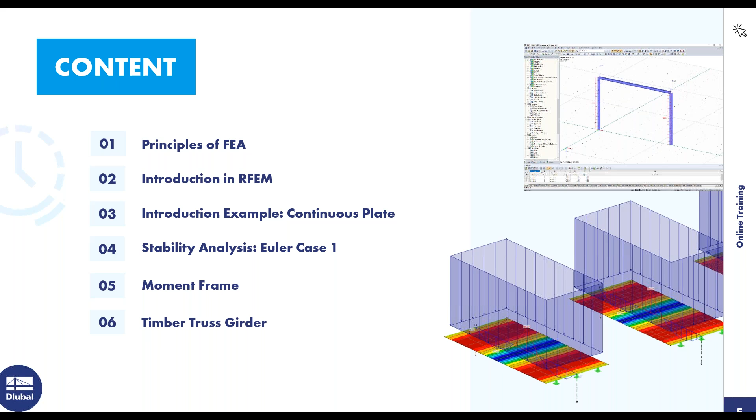So with that said, we can jump into going over the basics of FEA. So when using computer software, it's based on the displacement method, and another method you may be aware of is the force method. And this is where the unknown is the force, and then the internal forces can be calculated based off of this. When it comes to the displacement method, the unknown is displacement, and to solve for this, the displacement vectors must be calculated, and then the internal forces and support reactions can be figured out.

And the main problem today is when it comes to analytical solutions, they can be difficult to determine when it comes to large complicated structures. So doing hand calculations for some structures with complicated and odd geometry can almost be impossible or feel impossible. And the limits are being reached with large complicated structures. So it's difficult to get accurate results. And this is where FEA software comes in.

So complicated structures are then modeled and converted into a finite interconnected element mesh. And then the material and the cross-section properties are given at each FE node. And then the mechanical behavior is transferred between these elements. So here's a good word I would like you guys to walk away with and know: discretization, which is how structures are being submeshed into finite elements, which is kind of the overall idea of FEA. So that's a good word to have in your vocabulary.

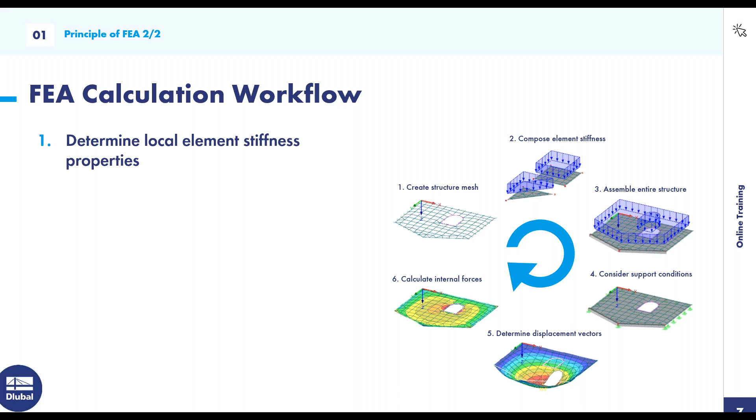Next, I want to go over the FEA calculation workflow. So this is also good to know for most FEA softwares. This is basically the workflow for them. So first, the local element stiffness properties are determined. And then those local stiffness properties are transferred to the global coordinate system, and then the assembly of the entire structure takes place.

And the boundary conditions or supports are then defined, and these could consist of sliding, rigid, or hinged. And then the displacement vectors can be calculated by solving the system of equations. And then lastly, the support forces and internal forces can be determined.

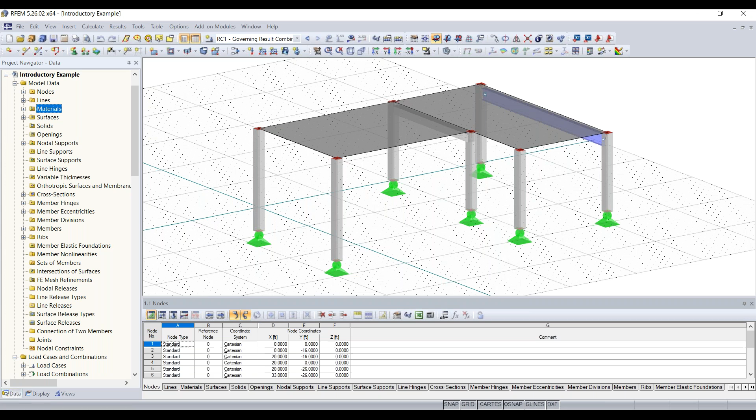Next we have our tables down here at the bottom. These tables can act like your project navigator, organizing all of your model data. But with the tables, you can change anything or add in model data. So if you wanted to model your whole entire structure with the tables, that is possible to do. So you can utilize that workflow if you'd like.

Also, you can change the background color. If we wanted a black background, we could go up into Options, to the Configuration Manager, and you can see that we can change our background to black, and also some other options as well. I'm going to keep mine white.

Then we also have the Insert menu up here, which organizes all of the tools. So if you wanted to insert nodes, lines, materials, members, this is all organized in this drop-down window. That's helpful if you don't want to use the tools in your toolbar, which is the next thing to go over.

So here are all of your basic tools that you need to model. If your toolbar doesn't look like this, you can rearrange your tools, or if you'd like that done automatically, you can right-click anywhere in this gray space and hit Reset to Default, and that'll reset your toolbar to look like mine. I think this is the best layout. Everything's organized where it should be, and I think it's helpful.

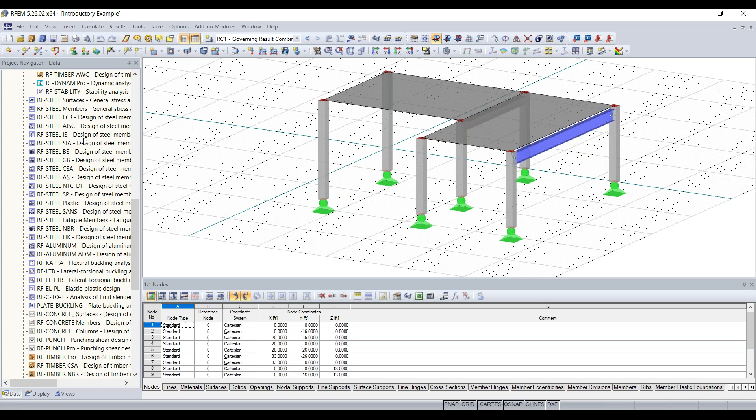In the project navigator, if you scroll down, you have a folder for your add-on modules. RFEM is great for checking and analyzing basic results such as deformations, internal forces, and support reactions. But if you want to get into designing specific materials such as steel, concrete, and timber according to a standard, this is where you would choose an add-on module to do that. We'll go over those more in depth later on.

The next tab in our project navigator is the display tab, and this allows you to turn off aspects in the graphical window. If you wanted to turn off something like surfaces, this just turns off the display. It doesn't actually get rid of the surface. These surfaces are still there, just not displayed. So you can turn things on and off in here, and you can manipulate results and things. We'll go over this in more detail later.

And then we have our views tab. Here we can set visibilities, and we can view members by cross section. So if I only wanted to view my W18x50 cross sections in my model, I could do that, and you can see it grays out the rest of the model, and I can easily point out my certain cross section there.

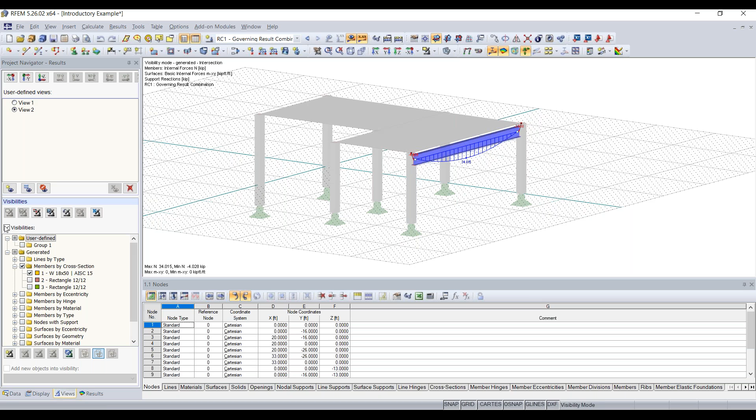The fourth tab, which you can't see right now, is the results tab. If I go up here and hit show results, and turn off my visibilities, now we have the results tab, and this is how we choose which results to show on our model. Right now I could show just my global deformations, and you can see them graphically as well. We'll go over how to view results and use this efficiently in the upcoming examples.

The last thing to go over is movement. If you have a mouse with a scroll wheel, you can press in the scroll wheel to move your model in translation. You can also use the scroll wheel to zoom in and out. If you hold Control and press in the scroll wheel, you can rotate your model. Those are the basic movements. If you're using a trackpad, you can use the keyboard arrow keys to move around, hold Control and use the arrow keys to rotate, and hit the plus and minus buttons to zoom in and out.

Before we get into the continuous plate example, I would like to pose one question: what is RFEM? If everyone wants to put their answer in the chat, we can go over the correct answer in a minute.

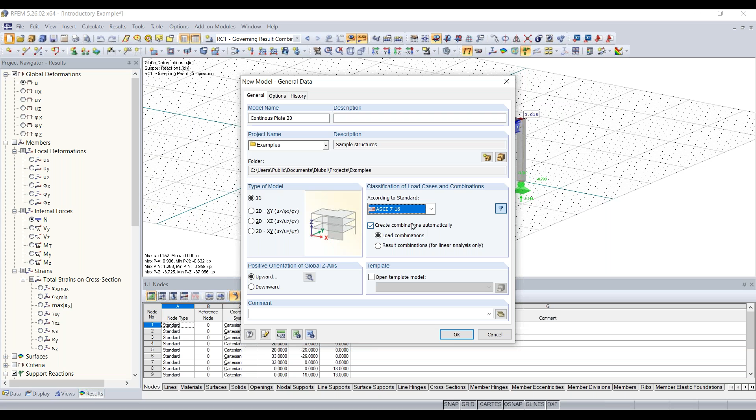Then the classification of load cases and combinations. You can have your load cases and combinations generated automatically according to a standard. If I hit this dropdown, you can see we have most standards to choose from. Today I'm going to use ASCE 7-16 for this example, but we could have used any other standard. Check this box to have the combinations created automatically.

Down here, you can set the orientation of your global Z-axis. There are two axis systems, the global axis system and the local axis system. If I click on this details button, you can see that each element in RFEM has a local axis system, and we want to have this set to downward.

So now that all of these options are chosen in our general data, we can click OK. And one other thing I'd like to also mention is I'll be using imperial units for this example, but you can change between imperial units and metric units pretty easily by going up here to Options and then Units and Decimal Places.

So if I wanted to switch from imperial units, I could open this up, and then there's a button down here called Load Saved Profile. So RFEM comes with 2 saved profiles by default, metric and imperial. And if I wanted to switch to metric, I would just have to double click on it. Or if I wanted to set metric as my default, I would check off this box here. So for now, for this example, I'll be sticking with imperial, but just know that you can switch back and forth between those pretty easily.

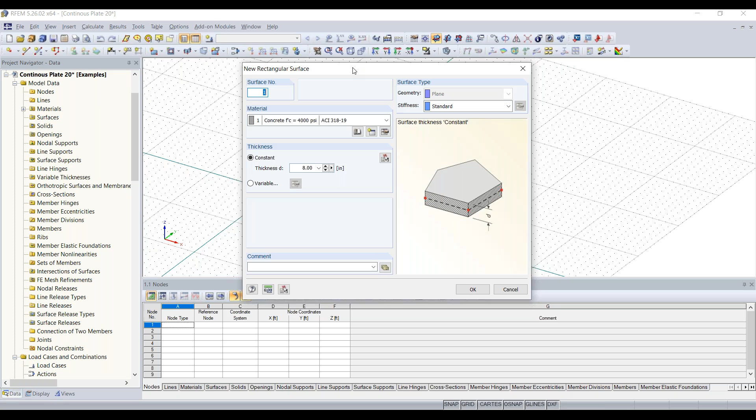So now the first thing we want to do is just create one of our plates. And to do that, there is this tool here called New Rectangular Surface. So if I click on that, you can see this dialog box will pop up called New Rectangular Surface. And the first thing we want to do is create our material. So you can see here, I already have a material loaded in, but if you don't have this loaded in, you would want to create a new material.

You can see here, you can create your own custom material by just entering the material constants, or we can choose a material from the material library that RFEM has built in. So I'll choose that. And then this material library dialog box will pop up. And on the left-hand side, you can filter to concrete. So for this example, we'll be using concrete. And then the material category.

And then for this example, I'm going to use the ACI standard, but you can also choose from other standards to pick your material out. You can see we have the Canadian standard as well as Eurocode. So I'll choose ACI, and then I'll choose 2019, the latest standard, and I want this to be 4,000 PSI concrete. Then at the bottom here, you can also see your material constants or material properties. If you would like to check those, you can do that. So I'll just hit OK.

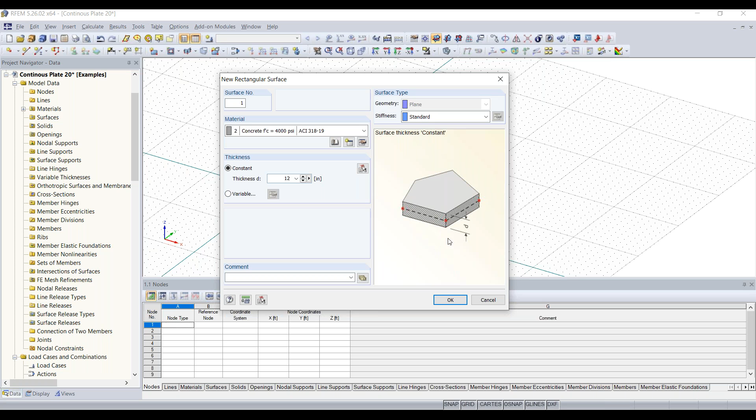And now the next thing we need to tell the program is what the thickness of this plate is going to be. And for this example, we're going to make it 12 inches. And now everything else is basically entered, so we can click OK. And you can see my cursor has turned into this reticle here, so I can snap to any of these grid points to put down the first corner. And the first corner is going to be located at the origin. So I'll left click on the origin, and then this plate's going to be 32 feet by 16 feet. So I'll go 32 and then up here to 16. And then I'll click again. And now you can see our first plate has been created.

Now the next thing we can do is we can either just draw the same plate up at the top here, or we can use the move and copy tool. So what I'm going to do is just right click to cancel out of that tool. And then I'm going to just highlight the whole plate here. And I can hold my control key down and then left click, and I can move this plate up, and I'm going to have these 2 plates spaced out by 5 feet.

And then the other option you can use is the actual move and copy tool. So if I highlight the second plate here, and then I go up here to this tool called Move and/or Copy, I can click on that, and then I can make one copy of this plate, and I want to move it in the Y direction, 21 feet.

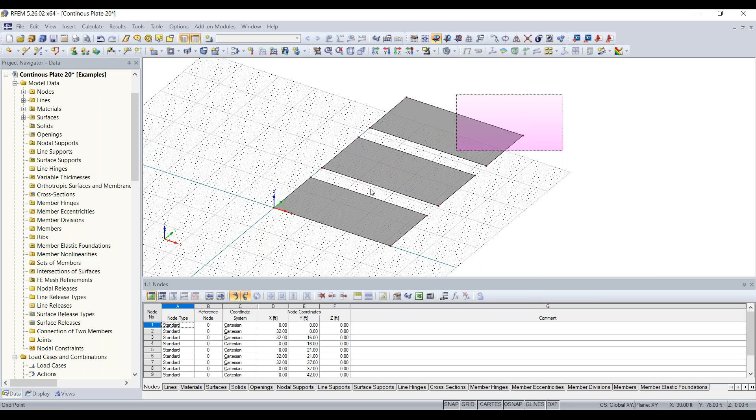Then just to clean up the model a little bit, I'm going to highlight all three of these, and I'm going to just drag this bottom left-hand corner of the second plate down to the origin, just to keep our plates within our grid here. And then also I just want to make some space for the beam that we're about to model at the top.

So to create a continuous beam, we're going to go up here to new single member. And this new member dialog box looks a little similar to the one for surfaces, but it's a little more complex, as you can see. So what we want to do is tell the program basically what cross-section and material this member is going to be. And you can see there's a member start and end. Just focus on the member start. So the whole entire member will be this cross-section and material.

We can click on this button here, create new cross-section. And then you can see you can enter manually the cross-section properties, just like the surface, or you can go up here to this button, import cross-section from library, which is what we want to do. So we'll click on that. And then you can see we have our categories here in the cross-section library. So we have our rolled cross-sections based on standardized rolled cross-sections.

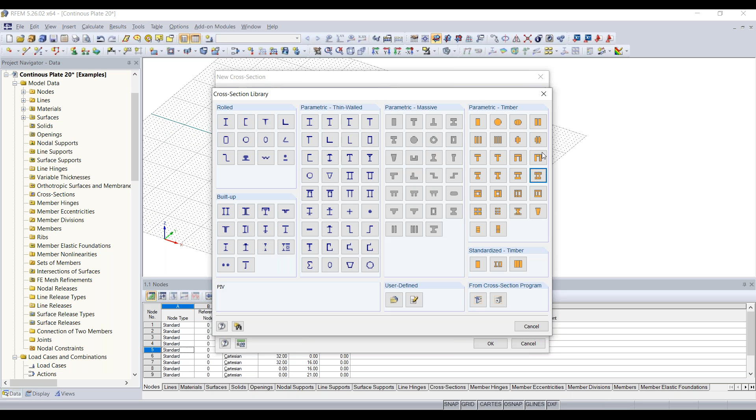And then we have our built-up sections here. And then we have our parametric thin-walled sections, so you can change these dimensions or input them manually as you would like. Then we have parametric massive, which is what we're going to use for our concrete continuous beam. And then parametric timber, and we have standardized timber down here. So I'll just choose the rectangular section from our parametric massive category.

And the base of this is going to be 40 inches. And then the height is going to be 16 inches, or 12 inches, so exactly the same as the thickness of our plates. And then the material we'll be using is the same as our plates, so 4,000 PSI concrete. So I'll click OK and click OK through all of these dialog boxes. And then I can start drawing my beam.

And I'm going to make this 5 feet away from the plate, like the other plates. So I'll just click for the member start. And then I'll click for the member end. And I'll right click to cancel out. And now you can see we have our continuous beam here.

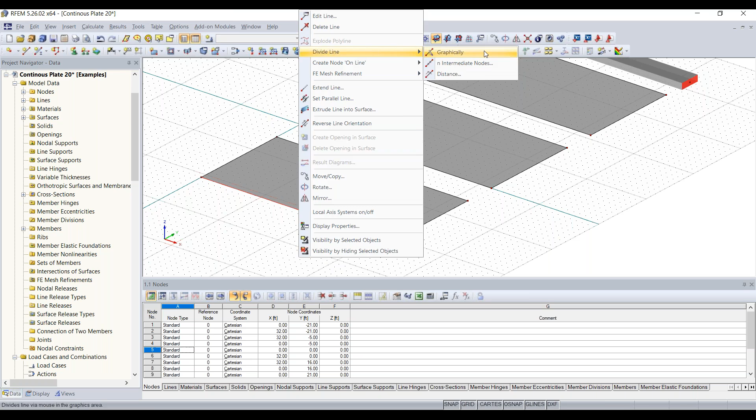So now the next thing we want to do is divide these lines here, because we're going to add in some center supports to the midspan of our plates. There are multiple ways of dividing lines in RFEM. I can just right click on this line here, and my shortcuts menu will pop up, and I want to go to divide line, and you can see there are 3 options for dividing a line. I can divide it graphically, which just allows me to snap to a grid point, and I want to divide it directly in the middle at 16 feet. And I could just keep going to the next lines to divide them.

But there are also a couple other options, so I can divide them by an intermediate node. So you can see here I can divide line by n intermediate nodes, and this will just divide it evenly. So if I just choose one node, it'll put a node directly in the center of that line. And then the third option is you can do it by distance. So if you really want to get accurate on where this node is going to be, I can either do it 16 feet from the start or 16 feet from the end or 50%, so it's in the middle. And basically I can just hit OK.

And now it's going to put that node right in the middle. If you're ever confused about the direction you drew your lines, you can hover over them and see an arrow telling you which way you drew your line. This is helpful mostly for members, but also for lines if you're dividing them and not sure where the member start or end is.

So then I'll just do the rest of these graphically. I'm just going to place some nodes here, right in the middle, and then divide my member here using n intermediate nodes. We'll click OK, and now you can see my beam here is divided into two sections.

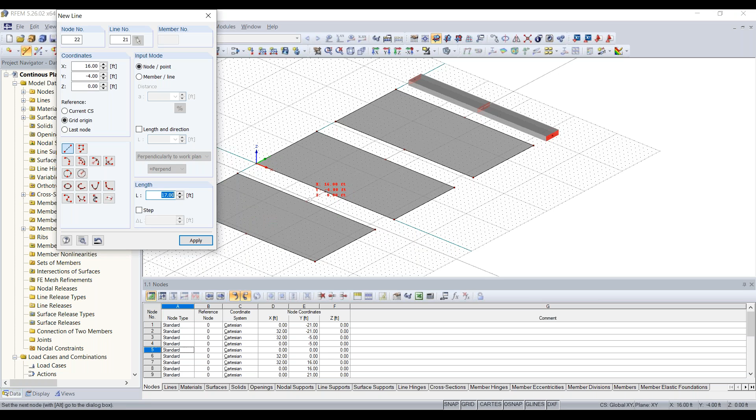So now we can add our supports. Actually, before we do that, we need to add in lines to connect these nodes. To draw a line, you can go up here to this tool called New Line, and then we can snap to the nodes we placed here and simply draw our lines, just like so. Now we can add our supports in.

So to create a new support, we can go up here to the new line support. We're going to support this center span continuously along this line, so we want to use a line support. And this line support is going to be hinged, so nothing can move in translation, but all of the degrees of freedom for rotation are released.

You can see we have templates, or already defined supports, but if you wanted to create your own custom definition, you can create a new support here. You can check or uncheck one of the degrees of freedom. All three of these are in translation, and then we have rotation. So for a hinge support, we would check and fix all of our translation directions, and then uncheck and release all of our rotation degrees.

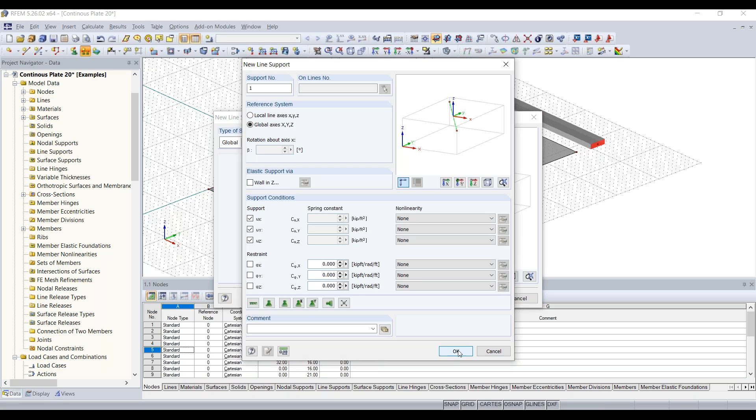We'll click OK, click OK again, and now we can just select all three of our lines here. This is going to actually be the same for our outside surface, right there. Now we just need to support our beam here.

This is going to be supported using nodal supports, so I'm going to go up here to new nodal support. Two of these end conditions are going to be hinged, so we'll make the end here hinged and the middle hinged. But what we need to do is fix the rotation about the beam's axis here.

If I right click, we can show the local axis system of this beam, and that'll show the local axis system of all of the lines there. So let's turn that off. Here's the local axis system of the member. What we need to do is, if we put a third hinge support here, then the member would be able to infinitely rotate about its x-axis, and that would cause instability in the program.

So what we want to do is go up here and click on new nodal support, and create a new type of nodal support. We want to fix the rotation about the x-axis, keeping the member from rotating about it infinitely in the program. Now you can see the difference between the support with the fixed X rotation and these two hinge supports that have it released.

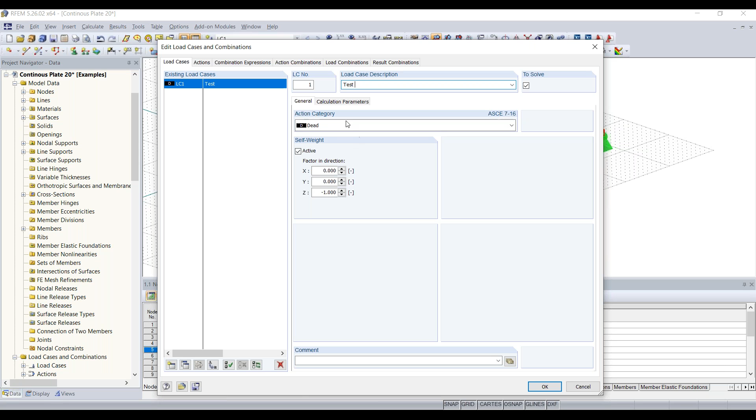So what we want to do is go up here to this button, new load case. This will open up our edit load case and load cases and combinations dialog box, and you can see a load case has already been created. Now we want to give this load case a description, so this will be test, and the action category according to ASCE 7 is dead. This is fine, we don't really need to worry about action categories for this model. We're just going to use this load case to add in our loading.

We also want to note that self-weight for the dead load action category is automatically checked, which will take self-weight into account for your model. We want to uncheck that for this example, and click OK. Now you can see we're looking at our load case here, test. Any loading we add right now will be added underneath this test load case.

So now what we want to do is create some surface loads to apply to our plates here. We're going to go up here to the tool called new surface load.

This is the new surface load dialog box, and we want it to be a force. You can see there are multiple different load types here. Load distribution, we want it to be uniform, and then we want it to act in the global Z direction for our load direction, so it'll be acting downwards. Now we just need to specify a magnitude.

This magnitude, we need to add a negative sign, and it's going to be 210 pounds per square foot, so that'll be 0.21 KSF. Then we can click OK. Now we can select our surfaces here and apply that loading to them. We can't apply that to our beam here because this is a member and not a surface.

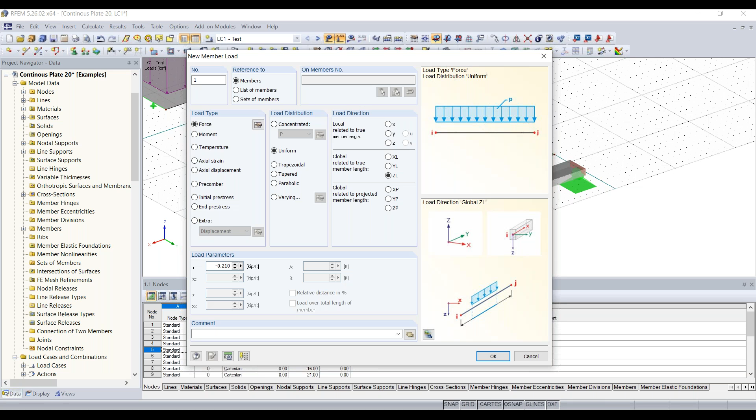This is similar to the surface load. We're going to have a load type force, and the load distribution will be uniform. The load direction is going to be in the global Z direction. Our magnitude is going to be the same as the plate, so negative 0.210 kip per feet. We'll click OK.

Now we can apply that to our beam. And we can right click to cancel out. Now you can see we have our uniform load applied to our beam.

Next we want to, for example purposes, create some FE mesh refinements. For now I'm just going to unshow the loading on our model to get a better look. To add in FE mesh refinements, we can simply right click on one of our surfaces.

There's an option here called FE mesh refinement, and we want to go to new. Now we just need to create a new FE mesh refinement definition. What this does is allow us to specify an FE length for a specific surface. For this plate, we want the element length to be 0.2. So we'll click OK, and click OK again.

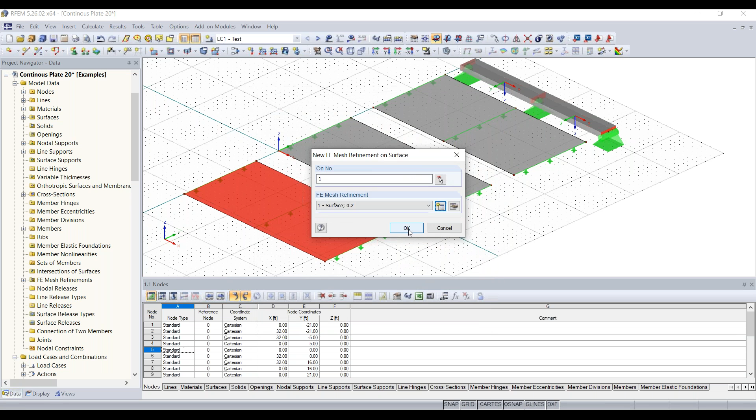And then you'll see this symbol here applied to the surface, saying that there's an FE mesh refinement here. So the whole entire surface will have an FE mesh length of 0.2 feet. Then we're going to do kind of the same thing for this next surface.

We'll right click on it, go to FE mesh refinement, and then go to new. You can see that definition I made earlier of 0.2 feet was saved, but we want to create a new definition again. This one is going to be 0.4 feet.

Then we're going to do the exact same thing for the third one. We can also go to the project navigator, and you can see now the FE mesh refinements folder has a plus sign next to it, saying that we have some FE mesh refinements in our model. We could just right click on this folder and click on new FE mesh refinement. This third one is going to be 0.6 feet.

So you might be catching on to the reason for doing this. I've got to specify the surface up here so we can do that graphically, so I'll select that surface. What this is going to do is allow us to see the difference in results depending on the size of your FE mesh. That'll be interesting once we run our results.

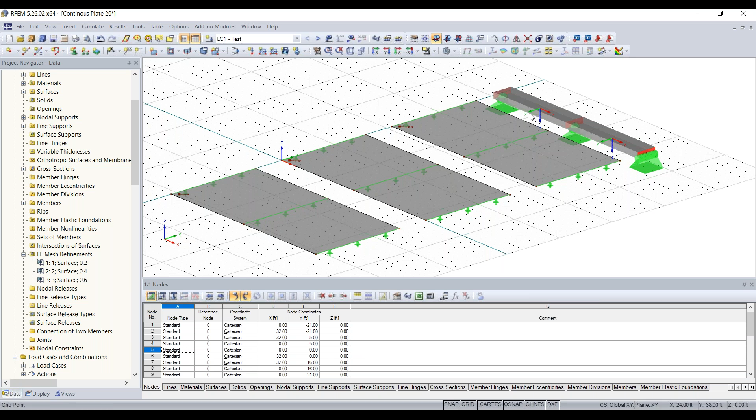Next we want to create some section cuts for our plates here. This will also allow us to view the results of the section cut right through our plate. To create a section cut, we can go up here to define section and results diagram, and go to create section numerically.

For the section name, I'm just going to name this one AA, and we need to choose where point A and point B of our cut will be. We can use this button here, select edge points of the section. I can snap to the center point of this line here, and then snap to the center point of this other side, so this will be point B.

And that's basically everything you need to set. You can see the plane that this section cut will be in is the local positive z-axis, so it'll be pointing upwards, and we can click OK.

So now you can see we have our section cut, and you'll see how this helps us view our results once we run them. Then we want to add this section cut to these other two surfaces, and an easy way to do that would just be to hit Control and then left click, and then we can just drag that section cut over like so. You can snap to that center point again, select it again, hold Control, and then left click. And now we have section cuts on all three of our plates.

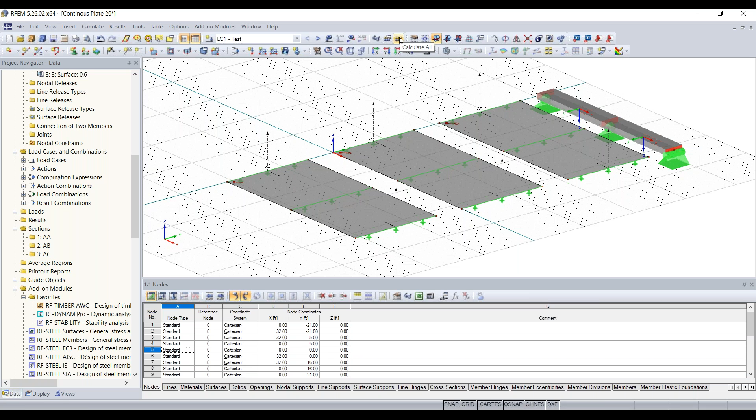And then now we're all ready to run our calculation. So we can either just hit show results to see the results for our LC1 here. But if we wanted to run the results for all of our load cases and combinations and everything, we can just go over here to this button called calculate all. And what this will do is just run through the calculations, and it should be ready pretty quickly for this model.

So now you can see we have our global deformations now shown on our plates and also our beam here. Right now it's just a yellow line showing the deformations for the beam.

And then you can see now we're in our results tab on our project navigator. So this is where we can choose what results we want to show. So right now I have global deformations checked, and that's the resultant. You can also take a look at the components and the X and Y and Z directions as well. Right now we're getting a max deformation of 0.02 inches, so pretty minimal.

And the next thing we can look at is, for example, the internal forces of our beam here. So we'll check on that. And right now we're looking at our bending moments about the y-axis, local y-axis. So you can see that moment diagram displayed on our beam here.

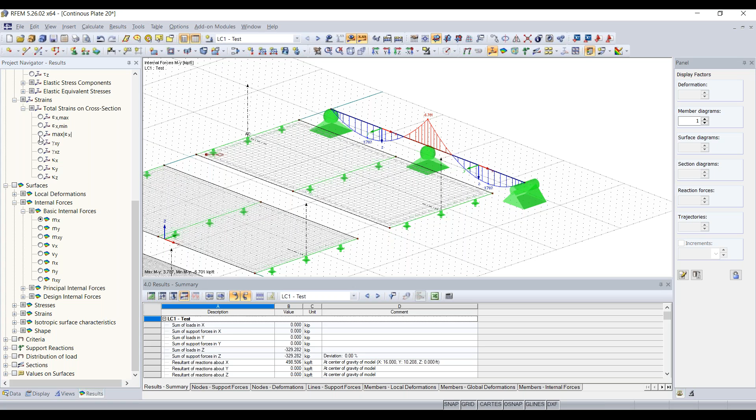So if we scroll down here to check on surfaces, right now we're looking at our bending moments along the local x-axis. So every element, like I said, has a local x-axis, and this is what the lowercase x means. If you see a lowercase letter next to the symbol, that's telling you that it's using the local axes of the plate.

So if I right click on my surface, which is easier if I change this to a different one, there we go. I can go to the local axis system, and now you can see what that looks like on our plates. And so in order to see the results better, I can also activate those on our plates.

I can activate my section cuts. So if I scroll down here in the results tab, still in the results tab, everything's just expanded. But you can see we have sections now, and I can activate those. And now you can see the results for our moments better, just with moment diagrams, basically through that section cut on our plates here.

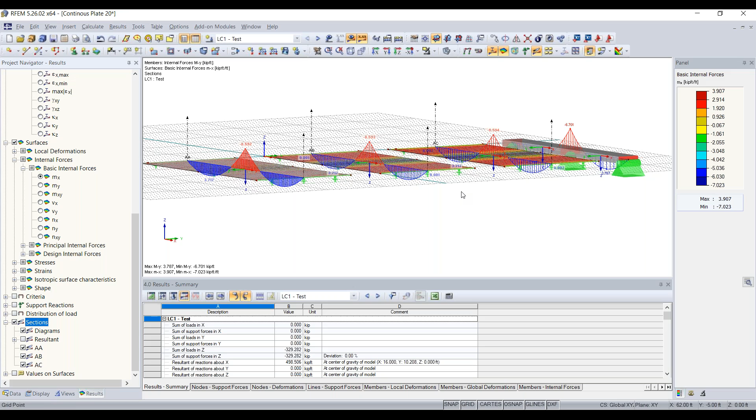So also now's a good time to mention the size you pick for your FE mesh does affect your results. So if we go up here to Calculate and go to FE Mesh Settings, this option here in the first general one, target length of finite elements, this is your global FE mesh.

So if we didn't add refinements to these plates here, then 1 foot would have been the mesh size, which would have probably been a little too big for these plates, but you can see how the results can change depending on the mesh size you choose.

Next thing I want to show you is if we go again to Calculate, and then we go to calculation parameters. Another thing I want to get into, or next topic, is shear stiffness. And first I want to show you how you can, with this option, deactivate the shear stiffness of your members.

So right now, by default in the program, shear stiffness is activated for members, but if I uncheck this, then it won't be. And this is important because if you're trying to compare hand calculations to RFEM, RFEM is always running the calculations with shear stiffness considered. So once I uncheck this and I click OK, it's gonna tell me that I'm gonna need to rerun my results because this option is going to change the results.

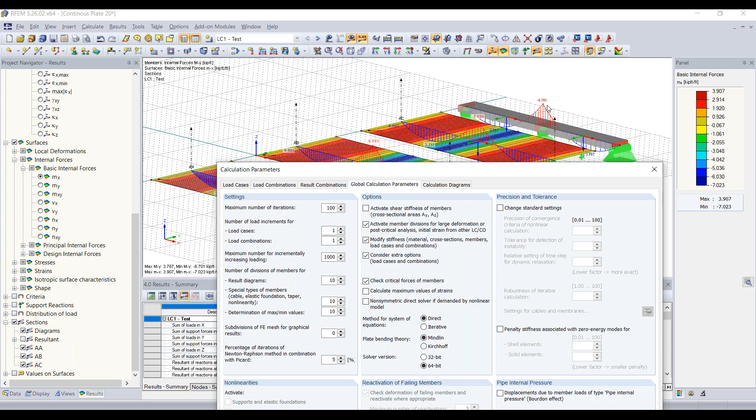So I'm gonna click no real quick just to show you, but right now our max bending moment is 6 kip feet, so 6.701, so we'll just see that it shouldn't change too much, but if I hit OK and delete the results, and then I just quickly rerun them, you should see some change in results a little bit.

So we were at 6.701, and now we increased our bending moment a little bit to 6.72. So nothing too large in change, but this is important to keep in mind if you're comparing hand calcs. And the reason that this change happens is because the methods mostly used in school assume that each member has an infinite shear stiffness when in reality there are some shear deformations happening when members or beams bend. So it's important to keep this in mind again when comparing hand calcs.

So based on shear stiffness, I just want to go back to the PowerPoint, and we can start talking about plate theory. And this will make more sense once we get into it. So I'm going to switch back to the PowerPoint. So to help understand plate theory, I'm going to use beam element theories as an analogy.

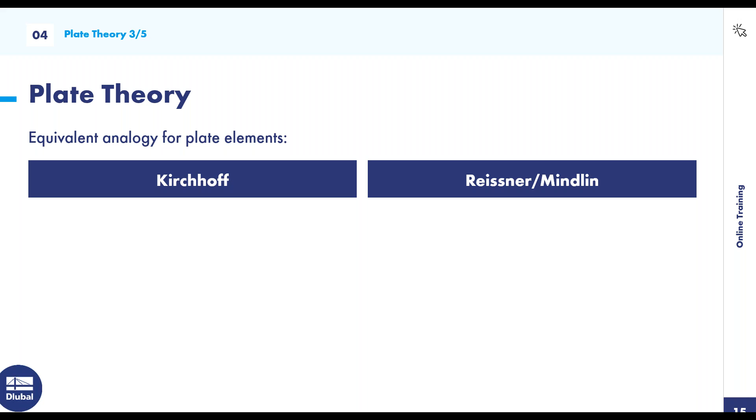Now, for the Reissner-Mindlin theory, we're assuming all of the same assumptions, and as you may have guessed by now, for this theory the shear deformations are considered, and also for this one we're taking into consideration transverse/lateral strains. And what I mean by transverse slash lateral strains

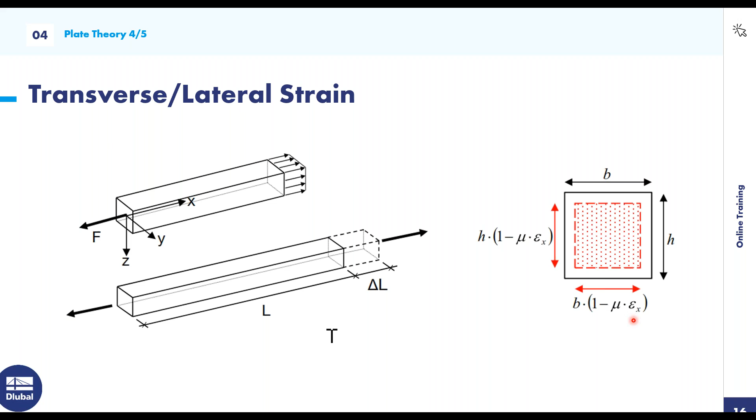So again, we have our two plate theories, the Kirchhoff theory and the Reissner-Mindlin theory. And again, just to summarize, the Kirchhoff theory has great results when using thin plates. For example, concrete slabs work great. Again, no consideration of shear deformations, and keep in mind that this theory only considers a pure bending load-bearing capacity. So this again is just more of a simplified approach. So keep that in mind when using the Kirchhoff theory.

And the Reissner-Mindlin theory works really well for thick and thin plates. In my opinion, the Reissner-Mindlin theory is what you should use most of the time, but I think it's good to know the difference between these two. So keep in mind that you'll get more accurate shear forces since the shear deformations are taken into account for this theory, and there's significant error when neglecting shear force, and it's going to yield a higher value when using this theory because of the additional deformations leading to additional shear forces. So these are two good theories to keep in mind.

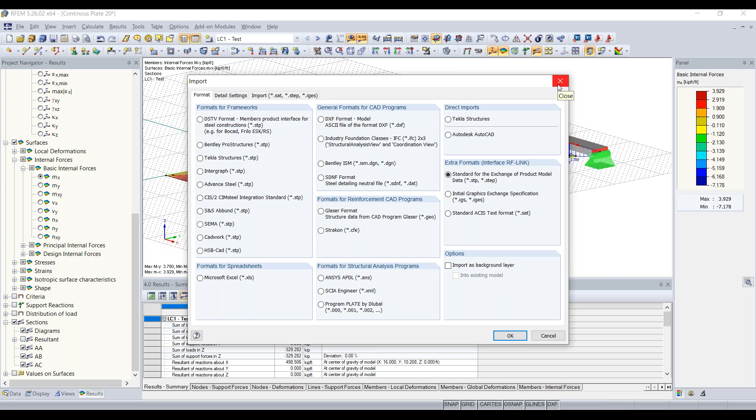The only other question that maybe I'll just reiterate is the topic of setting the local z-axis down. It was asked why we need to do this. So Alex, I think you can answer that with the local axes. Yeah. So for that local axes, you can have it set to upward, but we always recommend setting it to downward just because this is how some of our add-on modules work. For example, the concrete add-on module is mostly designed and based on having the local z-axis set to downward. And when you set it to upward for some modules like the concrete module, your results could look inaccurate. So having this set to downward is important.

Yeah, and I also had mentioned in the questions dialog box that this will be addressed in a future version of RFEM where this will no longer be an issue, and you'll be able to use either the local axis Z up or down.

A few more questions that came in. Does RFEM produce shop drawings? And the answer to that is no. It is purely for the structural analysis only. It does not produce any drawings meant for fabricators.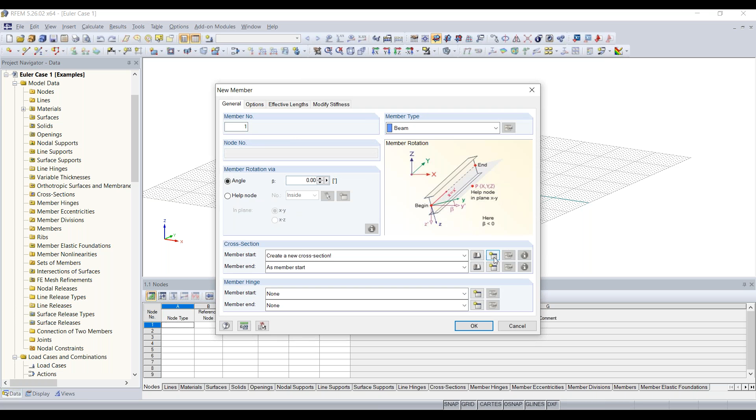So now again, we have our blank grid here. And the first thing we want to do is create a new cross section. So we can go up here to new single member. So we'll create a new member and we'll use the cross section library. So this is going to be a W shape. And we'll filter to the AISC and the manufacturer, and then we'll choose W shape. And then this is going to be a W shape 12 by 35. So we'll scroll down here to 12 by 35.

We don't want it made out of concrete, so we can go to import material from material library. And it'll be metal, steel, and we'll use the ASTM for this example. And we'll just make it steel A992. And click OK, and then click OK again, and click OK one more time.

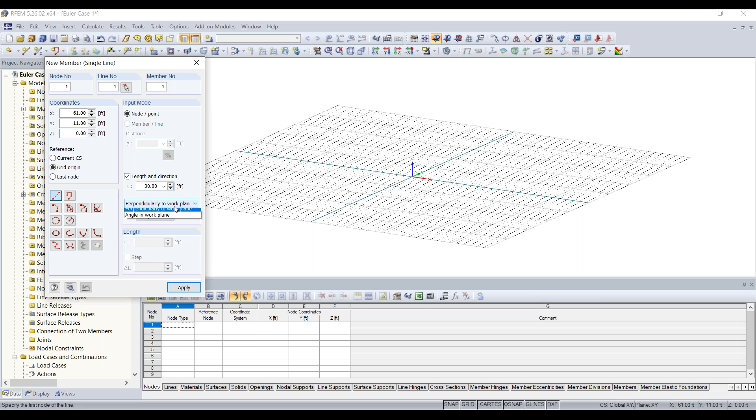And so this is going to be a 30-foot tall column. And we basically want to draw this member perpendicular to our plane here. So a couple options for that. We can either choose the option in this tool here, length and direction, and we could just type in 30 feet and select the option perpendicularly to work plane in the positive direction. Now you can see I can just draw this. I can select the origin here, and the program will just draw that member 30 feet perpendicular to our grid here.

The other option would have been to change our work plane. So we can do that up here with these three options. Right now the work plane is in the XY plane, but we can easily just change it, and we could have drawn our member up the plane there, and you can see again it's 30 feet tall. So we'll just change our grid back to the XY plane.

And then next thing we want to do is support this column. So we'll just highlight from left to right to only select the node down here at the bottom. And then we can go up here to new nodal support. And we want this nodal support to be a completely rigid support. So you can see all 6 degrees of freedom are fixed. So we'll click OK. And now we have our column framing into the support. And basically this is our model.

So what we want to do now is create a new load case. So we'll go up here to new load case and we'll name it test, just like we did in the previous model. And we'll turn off self-weight. So we'll deactivate that. And then we can click OK.

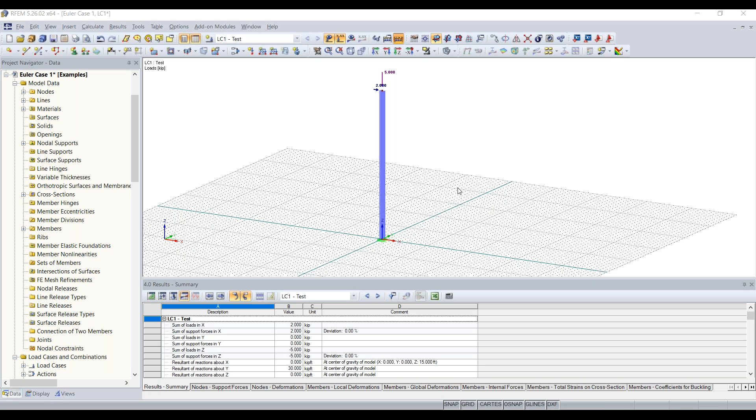And next thing I want to show you is something very important. So I'll hit calculate. And then we can take a look at our deformations. And if we look at this column from our side view, you can see it's deforming. And if we go to display, and then we choose under results, under deformations, and under members, we can choose colored sections, or cross sections colored. And now you can see the cross section here that's deformed, and we're getting a max deformation of 3.78 inches.

And then we can also take a look at our internal forces. So I'll check on members. And then under internal forces here, I can show the bending moment about the y-axis. So you can see at the bottom here is where we're getting our max bending moment of -60 kip feet. So we're getting a max moment of 60 kip feet at the bottom and a max deformation in the X direction of 3.782 inches. So keep that in mind.

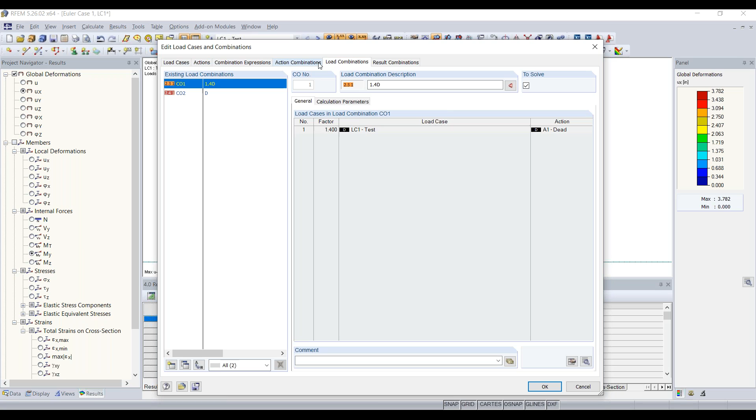By default, all load cases are calculated based on a first order analysis. So this is our load case here. If we go under calculation parameters, you can see we have a couple options for the method of analysis. Like I said, by default, load cases are calculated according to a geometrically linear analysis, whereas load combinations, which combine load cases into bigger combinations basically, are calculated based on a second order analysis, which takes little and big P-delta into account. What we can do is change our load case to a second order analysis.

Basically the difference is a first order analysis sets the equilibrium of the beam based on the undeformed system or undeformed beam, and a second order analysis sets the equilibrium based on the deformed system. So I can show you how these results and deformations change based on changing this to a second order analysis.

You should see that the deformations and bending moment will increase, and this is because of the P-delta effect. Now you can see that we're getting a max deformation of 3.9 inches, which will in turn increase our max bending moment to 61.6 kip feet, mostly because of that increased moment arm. So keep this in mind when you are looking at load cases and load combinations, where the results can change depending on whether a first order or second order analysis is run.

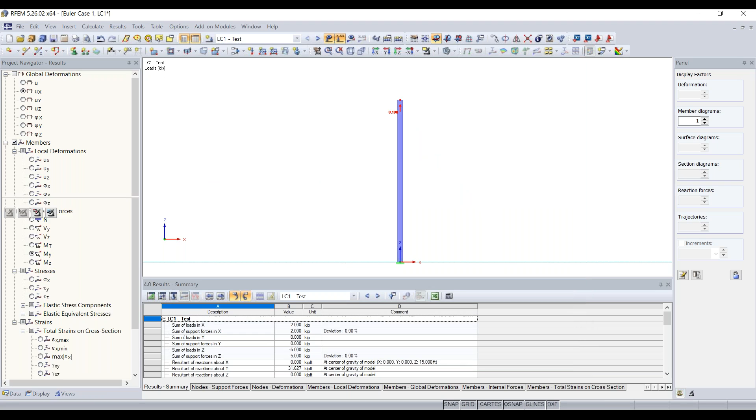For the next topic, I'm going to change the loads here at the top to only be in the axial direction. So we'll change the axial load to 0.1 kips, so 100 pounds. And then we're just going to change our lateral load here to 0. Once I do that, I'll click OK. And I actually need to switch the direction, so I'm going to double click on this load and change the sign of this, so it's a gravity load.

Next we're going to get into one of the add-on modules, the RF-STABILITY add-on module. All students have access to all modules, so you should have access to it. With the help of eigenvalues and different eigenforms, we perform a stability analysis on this column. To access it, we can scroll down to the add-on modules folder and look for RF-STABILITY. I have it saved in my favorites folder, or you can go up to add-on modules, then stability, then RF-STABILITY. You'll see the module open up, which is basically just a dialog box within RFEM.

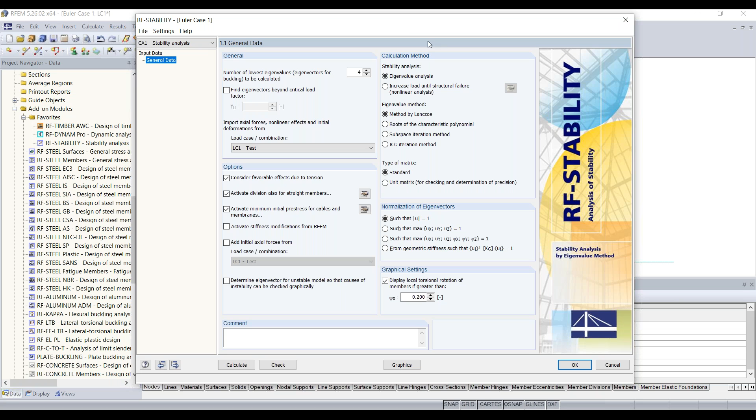Some quick background on stability analysis. Euler was a mathematician who came up with different cases to show the critical load factors, as well as critical loads and lengths. This is something that every stability analysis does, and when you're using this module, it's important to activate the division of straight members. You can see that's activated by default already. You can edit the options for this.

If we go to edit FE mesh settings, we can go down to the minimum number of member divisions and change this from 2 to 10. This just increases the accuracy of your results. So we'll click OK, and that's basically everything we need to change. We're running this stability analysis based on our load case 1, and the number of lowest eigenvalues we're showing is 4. That's also by default, and everything else we really don't need to worry about. So we can hit calculate.

Once the calculation is done running, you can see we have our results here, and we can take a look at our critical load factors for each of our eigenmodes. Our critical load factor for this first eigenmode is 135.

The critical load factor is the amount you would have to multiply your loads by in order to get an unstable system. It can also be looked at as the total percent of the loads your structure can take. So it's important to keep in mind, if this number is under 1, that means your structure can't handle 100% of the loading applied to it.

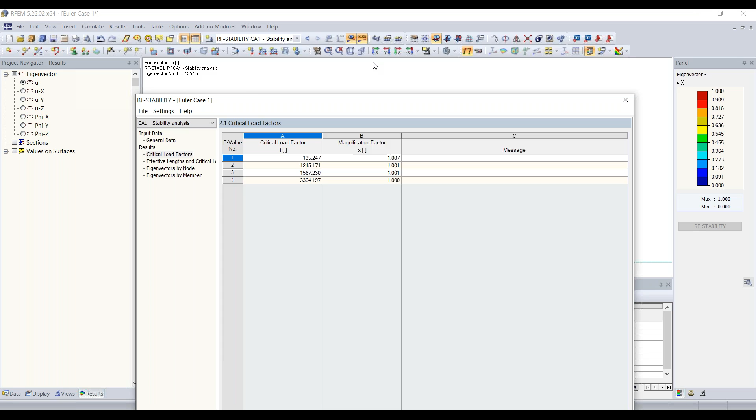So I have only 100 pounds applied to this column. Let's say this number was under 1, say 0.9, then my column would only be able to handle 90 pounds, and anything exceeding that would cause an instability. So that's the basic understanding of the critical load factor.

Next we have our effective lengths. We can take a look at our effective lengths for our member here for each eigenvector, and we can also take a look at the critical load here.

We can also view our results graphically and take a look at our eigenvectors. If I go down here and click graphic, we can turn our model around and get a better look at the first buckling case or buckling form.

If I wanted to look at the other ones, we can go down in the panel here and choose the factors tab. Under factors, you can see eigenvector number. Right now we're looking at 1, but we can change this to 2, 3, and then take a look at our fourth eigenmode.

You can notice that the weak axis of this column is in the y direction, about the local z-axis. This is mostly the reason for this. That's why this column is deforming in this direction, because of the weak axes, and the moment of inertia in this direction is smallest about the local z-axis.

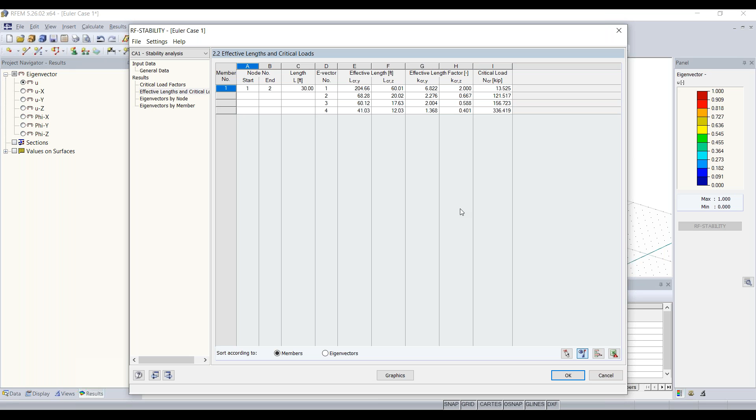I'd like to show you guys what it looks like when the structure is unstable. So we can go to our LC1 here and then double click on our loading. If we increase this load from 100 pounds to something like 14 kips, we can click OK.

Before we run our stability analysis, we already know that this structure is unstable. If you have an unstable structure, you need to make sure that you are not running a second order analysis, because then RF Stability will not be able to show you the critical load factors. So we'll go back into our calculation parameters and turn this back into a linear analysis.

Then we'll go back into RF Stability and hit calculate. Once this is done, you should see we'll get a critical load factor below 1. So we now have a critical load factor of 0.966.

This factor being under 1 tells us that our structure cannot take 100% of the 14 kips that we applied to it. So that's one way, if you have a structure and you're getting an instability and you've made sure everything's connected and modeled correctly, to tell if you need to optimize some of your model.

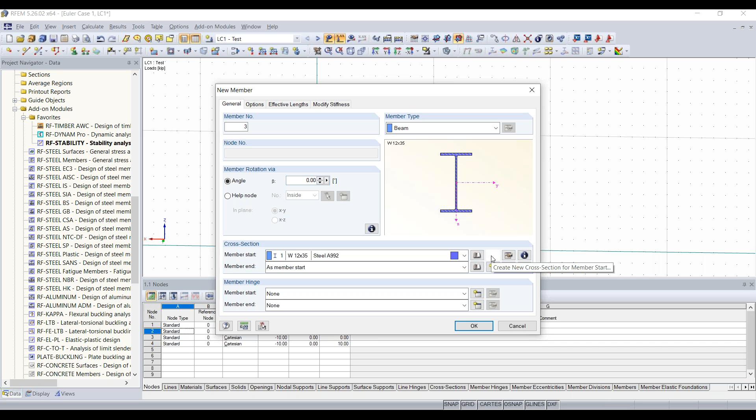Now we want to create the beam for the top of our frame. So we'll go up to the create new member tool, and then the beam connecting these two is going to need a new cross section. We want to go to W sections, and this beam is going to be an 8x15, so we'll scroll down. We'll make it steel A992, so it's okay. Click OK, and then we can connect both of these columns like so, with our beam. And now we have our moment frame.

So what we can do, just to make this a little more interesting, is add in a new member load. This new member load is going to be -3 kip per foot. It's going to be a uniform force in the global z-axis direction. So we'll click OK, and then add in our loading there onto the top of our beam.

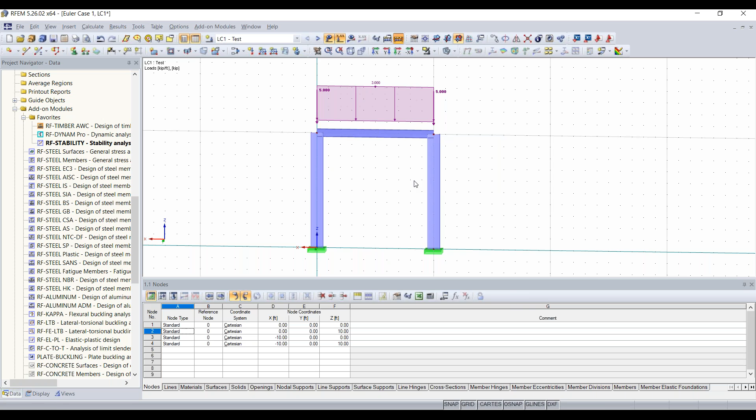And then we can run our calculation, so I'll just say calculate all. And then we can check out the internal forces and critical load factors. And now you can see we have our moments here along with our deformation.

And then, since we hit calculate all, we can go to our stability and take a look at the stability analysis that ran. So right now we're looking at our first eigenmode here, which is 4.89. So that's great, stable. And then we can scroll through and look at our other eigenmodes.

So basically you can see that this frame here is bending out of plane, which is not ideal. And I can increase that by a factor to exaggerate it a little bit. So now we can see what the major issue is. If we had too high of a load, this is something we'd want to consider.

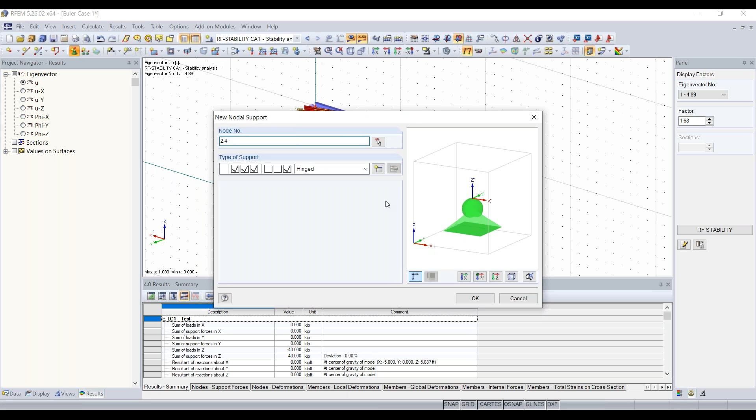So we can add in some supports here to keep this from bending out of plane. If I hold Control and select both of the nodes here, I can add in some nodal supports, create a new nodal support, and then change my degrees of freedom here to only support it in the Y direction, to keep it in plane. So everything else, it can move up and down, left and right, it can rotate, but it just can't move in and out of the plane. So we'll click OK, and now we have these supports up here at the corners.

And if we rerun our calculation, we should see some better looking eigenmodes. Yep, so our first eigenmode or critical load factor increased from 4 to 21, so that's looking good. And we have no bending out of the plane for our frame here. And again, you can scroll through and take a look at the other modes.

Something else I didn't show you, you can take a look at the support reactions. So we have our support reactions here. So that's basically the moment frame.

So now we can move on and get into the next example, which is the timber truss girder. This example will basically just be modeling this truss, then loading it, supporting it, and then I can show you how to design these members, and we'll be doing that based on the AWC standard. So let's hop into it.

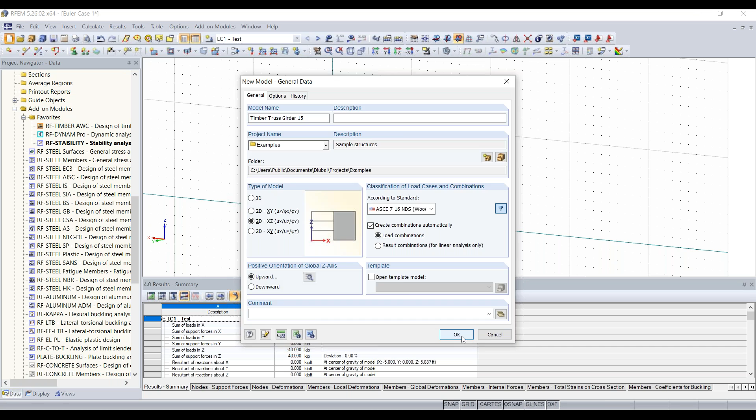And to start, we have, again, our blank grid here. You can see since this is only a 2D model, we can only keep our grid in the XZ plane. Can't move it in and out of the plane here.

And there's plenty of ways that we could go about modeling this truss. We could draw our members manually and measure them out and everything, or we can use a tool that RFEM has built in for creating truss systems. So if we go up here to tools, and then we go to generate model members, you can see we have a couple of options here for generating different models like 2D frames, tapered 2D frames. The tool we're interested in for modeling this truss is 2D truss.

And you'll see once this tool opens up that we have a couple of different truss types here that we can choose from. We are just going to be focusing on this first truss type here. And then the next option is to choose your diagonals, so you can see these patterns here. We're going to be using this pattern right here with the double downward facing triangles.

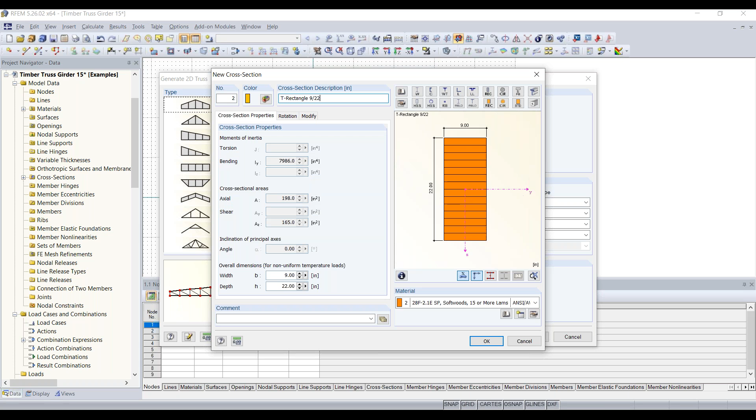And now what I can do is I can do the same thing basically for the lower chord, but I'm going to create a new cross-section, and then I can simply just hit Control-V and copy that cross-section description into the box up here and change my material. And then for this lower chord, I just want to change it from 9 by 20 inches to 9 by 22 inches, just to increase the depth, and hit OK again.

And then for the diagonals, it is the same procedure, but for this one, we're going to change our dimensions from 9 to 8, and then, oh shoot, and then from 22 to 8. So our diagonals are going to be our squares, so they'll be 8 by 8, and we're going to change again this material.

And then lastly, we'll create a new cross section for our verticals, and they're going to be a little different from our rectangular diagonals. So they'll be 8 by 4. And then change the material again.

And so now we have all of our cross sections defined. We also have member types defined here. So for the upper and lower chord, we have beam type selected. And then you'll see for the diagonals and verticals, they are truss types. And the difference between a beam member type and a truss member type is that a beam has fully fixed connections in all 6 degrees of freedom.

So the translation and rotation is all fixed, so moments will be transferred between connections. But for a truss type, this is a pin connection, so rotation is allowed, so there will be no moments transferred between or through connections to other members for trusses.

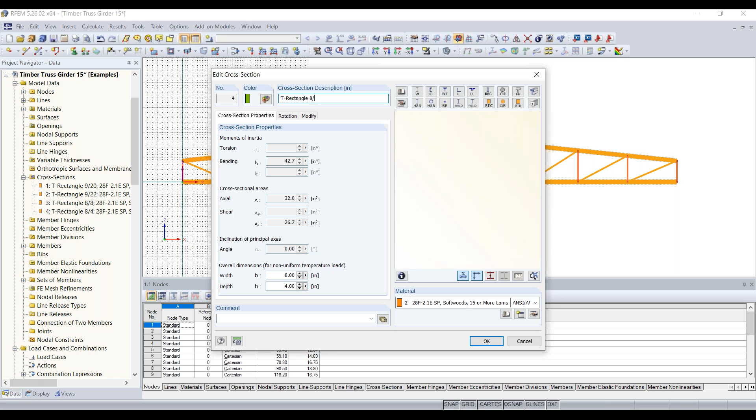One thing I do want to actually change is the verticals. We should probably actually increase the cross section of them. They are looking a little slim, so what we can do is simply just go to cross sections, and then we can double click on our 8 by 4 cross section here, and then we can simply just go up here and change this to a depth of 6, and then we should have an increased cross section there.

And now the next thing we want to do is delete the bottom left and right members, because we're going to support our truss at the ends of the upper chords here. So what we can do is just hold Control and select these bottom left and bottom right hand members here and delete them. And then we want to delete the lines there as well.

And the next important thing that we want to do is make our outer diagonal members here beam types, because if we leave them as truss members, which they are right now, then there will be no bending moments transferred between the bottom and top chords. So I'm going to hold Control, select both of them, and double click on them. And then we can just go up here to member type and change that to beam.

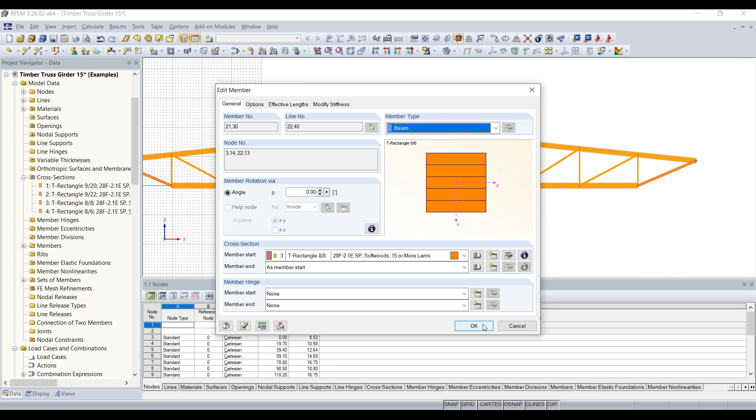So this is a good visual. If I have them set to truss, you can see the member hinge is grayed out, meaning that they're pin connections and we can't choose the member hinge for a truss member. But if I choose beam type, then you can see that the member hinges are available to be customized. So we'll click OK.

And then we also want to make sure these members are included in our set of members. So a set of members in RFEM is basically multiple members all combined into a set. So if I change my rendering to wireframe and zoom in, you can see my top chord here has a dotted line around all of the members up here. And this is showing you that these are all within a set of members.

And basically what a set of members allows you to do is just to easily show the results for all of these beam segments as one large member. This just allows you to view the results easier. And it also allows you to apply loading easier, and it allows you to design all of these members as one long continuous member. So you can see that the top chord has a set of members, and then the bottom chord is also a set of members.

But you can see these diagonals are not part of the bottom chord set of members. So we can simply just double click on this dotted line here, and this will open up the edit set of members dialog box. So you can see the second set of members, lower, is defined as the lower chord, and members 12 through 19 are included in here, but we want to include the diagonals. So I can select them graphically and click OK, and then click OK again, and now you can see my diagonals are part of my bottom chord here.

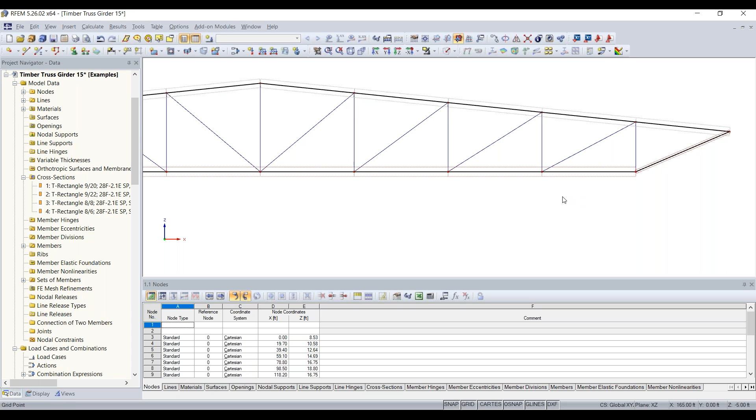So now we can add in the supports for this truss. So we can go up here to new nodal support, and for the left side support, this is going to be a hinge support. So what we want to do is choose hinged, and you can see there's no rotation about the y-axis because this is just a 2D model. So I'll add in that hinge support on the left-hand side.

And then for the right-hand side, we're going to add in a hinge support, but this one is going to be different. It's going to be a rolling support. It's going to be able to slide in the X direction. So we can release that. And so basically this one's only supporting the frame in the vertical direction. And also it can't move in and out of the plane.

So we'll choose that corner, and then I can right click to exit out of that. Also, you can see my truss is basically outside of my grid here. And what we can do is have the grid automatically adjust to the size of our model.

And to do that, we can go up here to the settings of work plane. And there's an option under here called dynamically. So for the number of grid points, we can have this set dynamically according to the size of model. So if we check that option and hit OK, now you can see our grid has automatically adjusted to the size of our model.

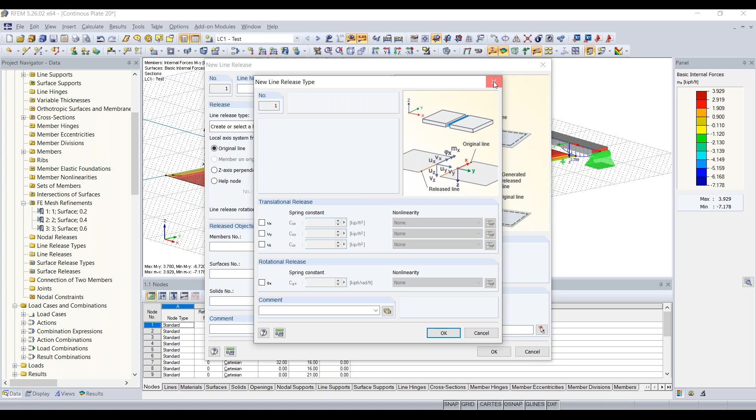And then you would have to just tell the program what surface that beam is being released from. And then that's basically it. So that's kind of the basics of how to use this line release tool to release the moments between a beam and a surface. Yep. Okay, good. That should answer that question.

The other question is, let's say a user wants to only work with a particular story and they want to just activate that view. I think it's worthwhile showing the different visibility options and creating user-defined visibilities. Again, just a short example would be fine.

And to preface this, again, we don't have the concept of stories, floors, or diaphragms in the program quite yet because this is a general FEA program, unlike ETABS, which is meant for building structures only. So that obviously has the concept of stories and floors, whereas something more like SAP 2000 is what RFEM is more comparable to. But with that said, it is possible to create these user-defined views that Alex will show you, so you can create your own story 1 view, story 2 view, and quickly switch back and forth.

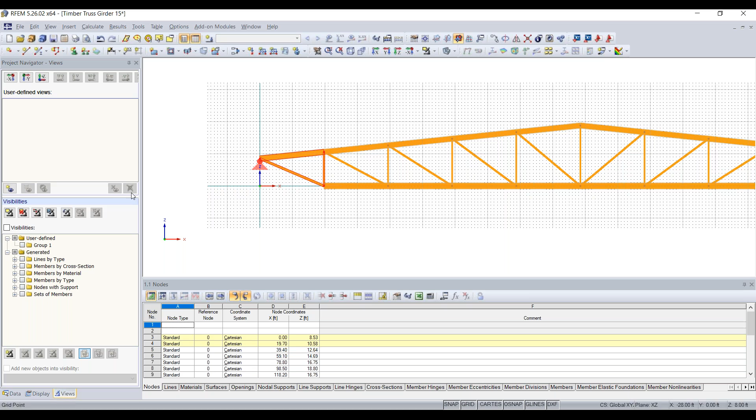Yeah, so I'm just going to use a couple of these members. So let's just say you have a building with multiple stories and you just wanted to switch to one of the stories and work on it. Let's just pretend that these 3 members here are a story. You could then hit the visibilities box here.

And so I basically have my first story selected, and then I could choose this option here, create new user-defined view, and I could just name this like story 1 and hit OK. So now I can right click and I could even uncheck show hidden objects in the background. Oops. So maybe I did that wrong.

I think you just didn't have the 3 members displayed when you created that visibility. Oh, yeah, that might, okay, let's try that again. So turn off, oh. Yeah, so I guess the better way to do this would be visibility by window, and then we could select those members and then create a new visibility, and then that would be your story 1.

And now you could turn off show hidden objects in the background. So that would be your story 1. So then every time you could create multiple stories, and then all you'd have to do is just go to your user-defined view and check on which story you would want to see. And then, yeah, that's fine. I think that's the perfect way how to do it.

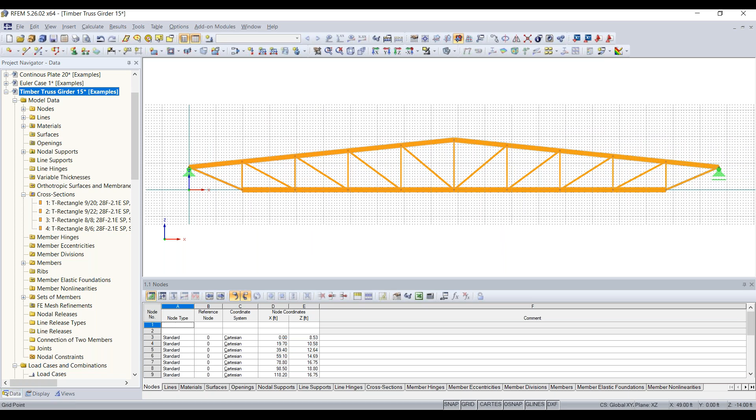Yep. The final question, is it possible to create tapered members for the RFEM structure? So I think that's worthwhile showing the example. Again, no need to do it, but where you can set the member start and member end as different cross sections. Yeah. So to create a tapered cross section or a member, easiest way to show this is I'm just gonna edit one of these real quick. And that's kind of where the member end comes into play.

So let's say you wanted to taper this member from the start, and you wanted it to start at 9 by 20 inches or whatever, and then you wanted it to go to, I don't know, 5 by 10 or something, you would just make the member end something smaller. Just example, if I change this to 8 by 8 and click OK, you can see that then RFEM will interpolate the start to the end, and that's how you can taper your members like that.

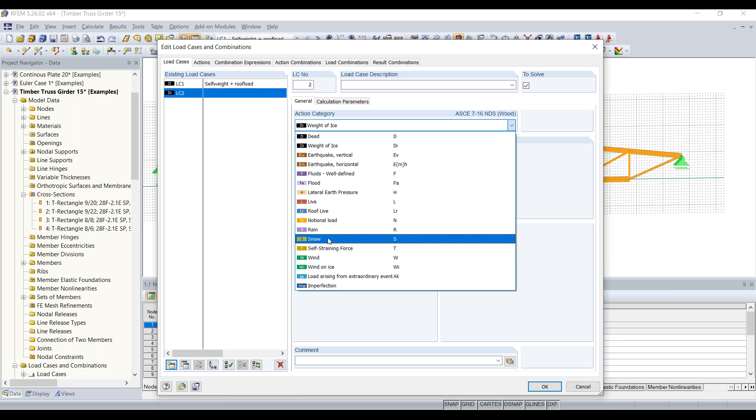So we have our dead load case, and then we can go down here to this button, create new load case. And we can make the action category for this one snow. This is going to be a snow load. And this snow load is only going to be applied to the left side of our truss. Then we can create another one. This is going to be another snow load for the right side. And then we'll create a fourth load case. And this one will be wind uplift, and change our action category to wind. So now we have all of our load cases created.

I just want to show you guys the rest of these tabs. The next tab is our actions tab, and you can see our multiple actions listed: dead, snow, and wind. And if I click on snow, you can see by default, snow is set to alternatively, which means the two snow loads will never be placed basically into the same load combination. And this means that I need to activate the option simultaneously, since both snow loads will be acting together on the left and right hand sides.

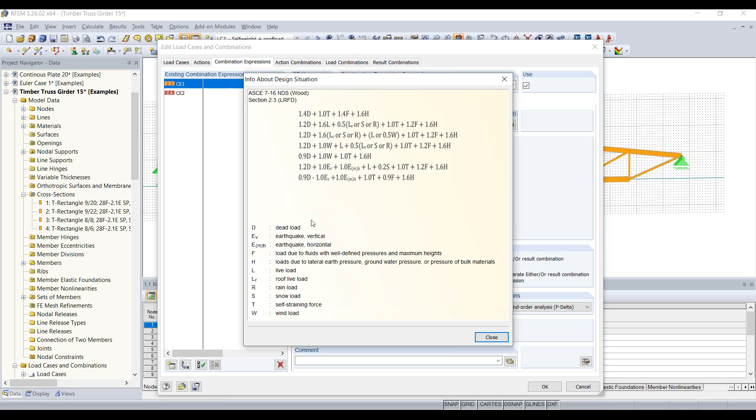You can then see in the next tab, combination expressions. We have our LRFD and ASD combination expressions. And if I click on this I button here called info about design situation, we can take a look at our design situation based on the code or whatever code you have selected. This will tell you what the design situation looks like along with the parameters. And then we can take a look at our action combinations.

And also the next tab is our load combinations. And this is where basically multiple load cases are going to be combined into a larger load case, essentially with or without factors applied to them. So we have this base generated based on our design situation and the standard. So for example, this first combination is just 1.4 times our dead load. And so the last tab is our result combinations. And also, again, just to reiterate, load cases are calculated on a first order analysis, and the load combinations are all by default calculated based on a second order analysis.

For the result combinations, these are envelope solutions and basically summarize the maximum and minimum results from all of the load combinations included in them. And so you can see we have, for this first result combination, all of our LRFD combinations or ultimate limit state design, and then we have our serviceability limit state or ASD combinations summed up or combined into this second result combination. And just some background, this combines the results, and so you could create result combinations without having to rerun results if you needed to.

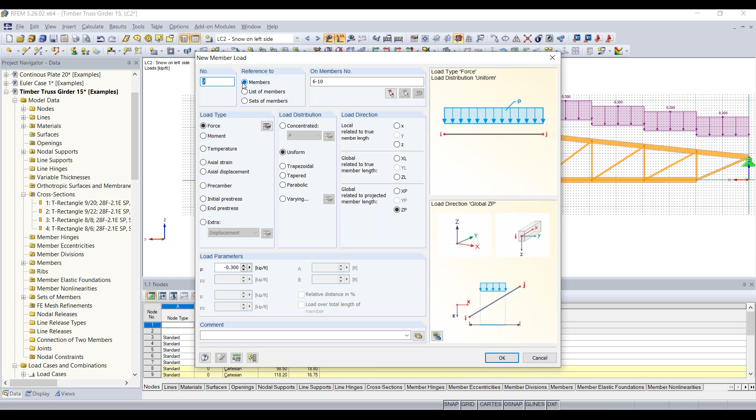And since we already selected the members before we went into the tool, if I click OK, we applied our load. Actually, I don't know why I applied it to the wrong load case. So Control Z is your friend, and you can go to the next load case, and then we can just redo that real quick for our snow load on our right-hand side. There we go. Now we have our snow load for the right-hand side.

And now all we need to do is add in the uplift. So again, we're going to use the new member load tool. And the thing we need to change for this is the load direction. We want this to be according to the true member length and the local z direction. So you can see that lowercase letter. And we're going to make this negative 0.035, or 35 pounds per foot. And we can click OK. Oh, we also need to change the reference to set of members, so we can select our upper chord. And then we can click OK. And now we have our wind uplift taken into account.

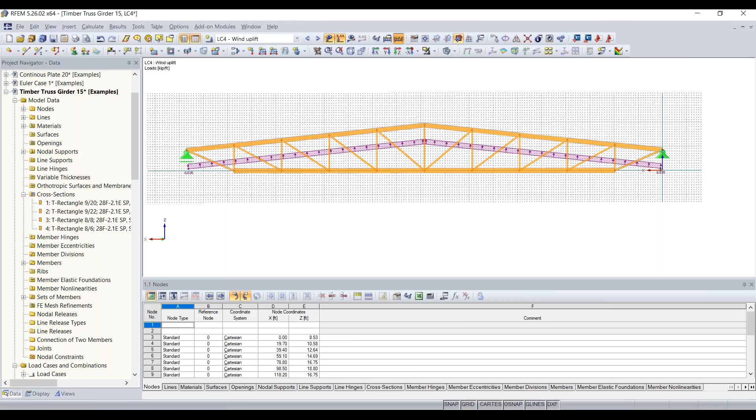So I'm going to run the calculation now. I'll click Calculate All. And while that's running, I would like to ask a question, and then we can go over the answer afterwards.

All right, so the question was, which generate model tool can be used to most efficiently model a truss system? The options were continuous beam, 2D truss, tapered 2D frame, or 2D frame. And the best option is to use the 2D truss tool. This is the most efficient way to model a truss system in RFEM instead of having to do it manually. So we can go back and take a look at our results that ran.

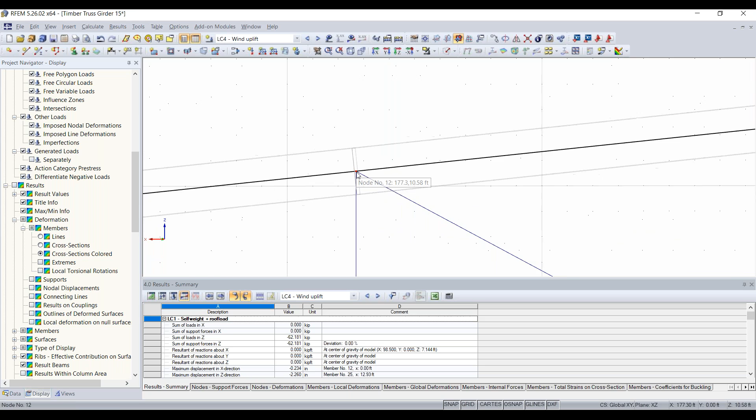This mostly occurs, I would say, when importing a model from AutoCAD or from maybe Revit. Sometimes imports have unconnected members because of differences in tolerances between the two programs. So it's always important to check that.

Second step I recommend taking is to always check the deformations of your self-weight or dead load case. So if we go up to our self-weight load case and we show the results, right now we're looking at the global deformations, and you can see that our deformation is symmetrical, which is good. We have a symmetrical structure here. We can just look at the Z component. So this is something that you would want to double check if you have a symmetric structure, is if your deformations are symmetric. And our max deformation right now in the Z direction is 2 inches. So that's looking pretty good, as expected, I would say.

And then the third check is to look at your internal forces. So again, if we activate members results, and then we take a look at our normal forces, you can see that our upper chord, we have compression forces for our normal forces, which makes sense in this layout. And then our bottom chord is blue, positive values, telling us that we have high tension forces basically, which also makes sense for this loading setup at the bottom here. So you can see in the middle, we have the highest tension forces of around 90 kips.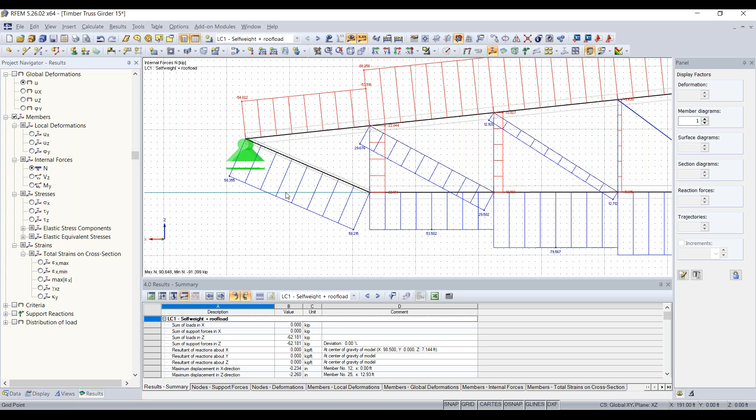And this is important to point out: you can see we have very high forces on our outside diagonal members here, which I did on purpose. So I can show you later how to optimize these, since these will be critical members, since their cross section is a lot smaller than the main cross sections that we created for our bottom chord here, and they don't really compare too much in size with the bottom chord and the tension forces that it's receiving.

Next thing we can also take a look at are shear forces. These are pretty low, which is expected with a truss. Since we're working with a truss, we are not really expecting too high of shear forces. And then also our bending moments, we can see the same thing as shear. They're not too high, which is as expected since trusses mainly transfer normal forces, such as tension and compression. We're not really too focused on bending moments.

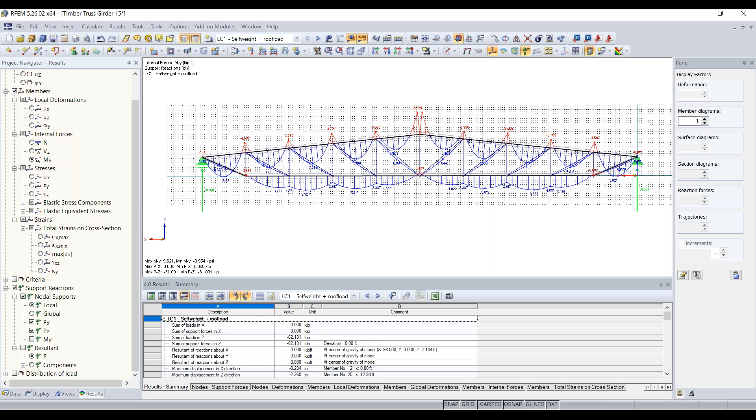And now you can also check your support reactions. This is another great way. I can also turn off the grid down here so we can see those values easier. On the left-hand side, we're getting 31 kips. And on the right-hand side, we're also matching that number. So with a symmetrical structure like this, it's good to see both of those matching. That's what we would expect.

And then the last way to check your structure is to go down into the table down here, and we can take a look at table 4 results. And you can see for the self-weight plus the roof load that we can take a look at the sum of the loads in the z direction, and then the sum of support forces in the z direction. And you can see that both of those values match, so 62.18 kips for our sum of loads, and then 62.18 kips for sum of support forces.

So both of those should match because of statics and reactions to the loading. And you can see we're getting a deviation between those of 0%. So anything other than 0% deviation will be flagged by the program. So an error will be thrown up, and that just means that something is not correct with your model.

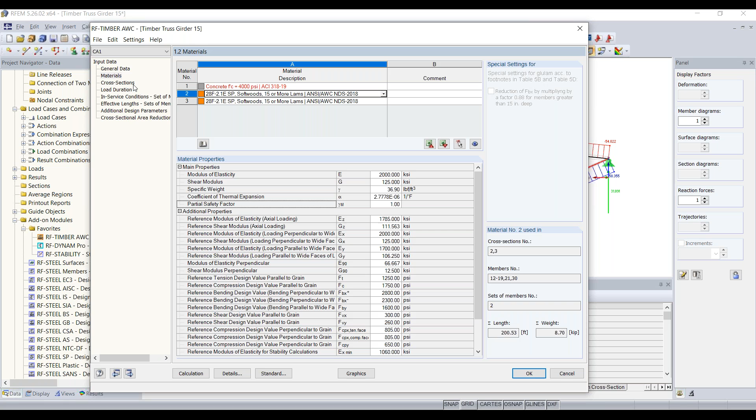Then you can also see our cross sections that we're using. Those are automatically imported, and you can see we have 4 of them. We have our 9x20, 9x22, and our other ones, and we can click on those. And the optimization column here, I'll get into after we run our results, but keep that in mind that that's there.

Then we have our load durations, and you can see these are automatically set based on the action that you choose for your load case, so you don't need to worry about that. You can see here the design situation uses the shortest load duration in a combination, or you can choose user-defined settings.

For now we're just going to leave that as is and move on to the next category, which is service condition. You can choose between dry or wet conditions, and also the temperature at which the structure will be placed for both sets of members. We're going to leave that as default, less than 100 degrees and dry conditions.

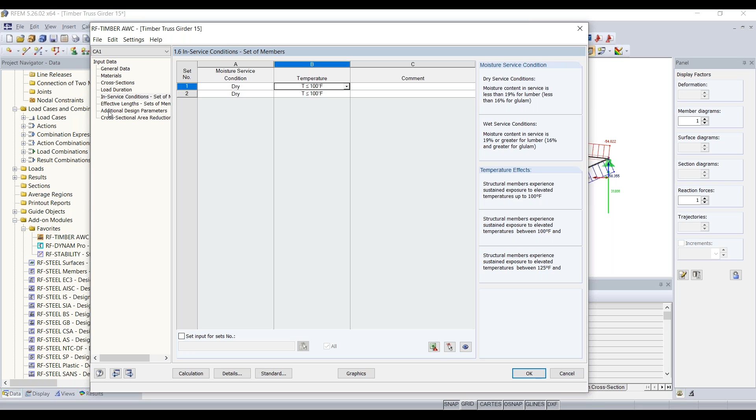The next category we want to get into is the effective lengths, so for this we're going to have to make some assumptions. This is for your stability checks: buckling about the x-axis or strong axis, buckling about the weak axis or y-axis, and then lateral torsional buckling.

The first assumption we're going to make is that we have purlins connected to the top chord, framing in every couple of feet, going out of plane, and fixed to it. This means we do not need to consider buckling or LTB for our top chord, so we can uncheck buckling possible and uncheck the possibility for lateral torsional buckling.

Taking a look at our bottom chord, you can see we have no compression forces, only tension — that's what the positive values in the blue coloring show us. Without compression, we also don't need to consider buckling or lateral torsional buckling, so we can uncheck those. Another way of doing that would be to go to the details option, and under stability, uncheck perform stability analysis. Either way works.

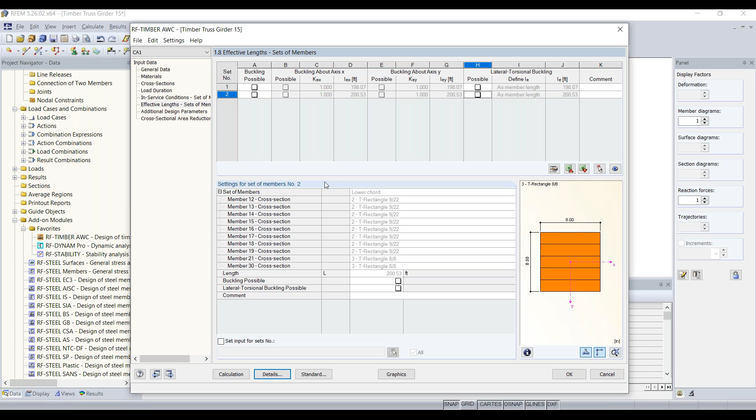Now we have all of our parameters, plus some additional design parameters. Right now by default we're taking into account no shear reduction and we have edge bonding. If you needed to change these, maybe you have no edge bonding and an odd or even number of laminations, and if you want to take shear reduction into consideration, we have that option too. Under cross-sectional area reduction, we don't need to worry about this for this example, we'll leave it as is.

Now we can run our calculation. Before we take a look at our results, I have another question — really a statement, if you could answer true or false, and then we'll go over the correct answer.

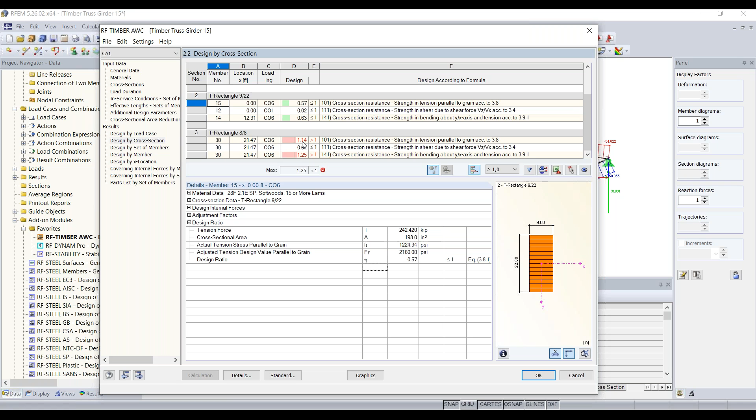If we go to cross-section and take a look at our cross-sections, they all look good, except for our 8x8 diagonals here, which are exceeding our design ratio of 1.0 for bending and tension.

This is kind of what we expected since we saw those high compression forces or tension forces. And this is a pretty small cross section.

So we can go through details such as material data or characteristics. We can look at cross-section data here. We can also go through design and internal forces.

So you can see here we have a normal force in our cross-section, a max of 157 kips, and also some bending moment of 3 kip per feet.

Then according to the AWC design, we can take a look at our adjustment factors, and we also very nicely have listed our references to the code here and where we reference the code to come up with these factors. So if you ever needed to double check any of these, always great to have those code references. So that's for tension stresses, and then our bending stress adjustment factors here.

Then we have our design ratio. So this basically goes through and shows you the factors and parameters that go into coming up with the final design ratio. And again, we have some code checks down here, which equations we're using as well. So always good to know that.

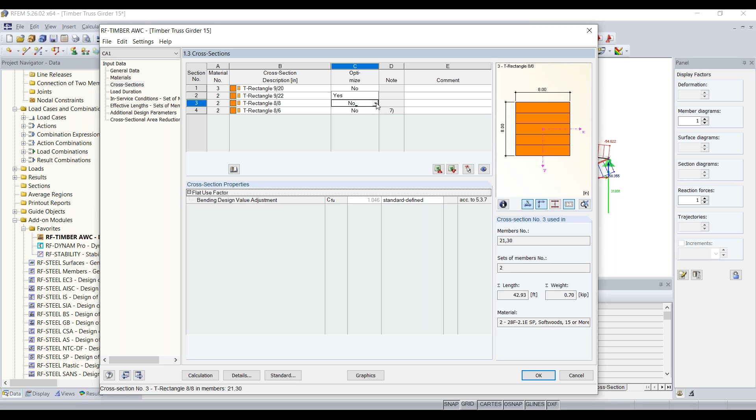And what we can do is under optimize, we want to click on the cell and then click on the arrow, and we want to set this to yes. And so then this box will come up and we can choose to optimize our base and height. So we'll choose base and height, and then we can choose this option down here, keep current side proportions. So the ratio between base and height, if we choose this option, will stay the same, which is nice.

Minimum, we want to - well, minimum doesn't really matter since we're exceeding our design ratio, so we'll just set that to 8. Maximum, we'll set to just a whole number of 17. And then increments, we will set to 1 inch increments to increase or decrease by. Really, you can set this to what you prefer, but this works out here, so we can hit OK.

And now all we need to do is hit calculate. And then you'll see that we are now meeting our max design ratio. So all of our cross sections here are passing. Our max design ratio now is 0.79 instead of above 1.

We go to design by cross section and scroll down to our diagonals. Now they are a 10 by 10, or optimized to a 10 by 10. And the max for those is only 0.7.

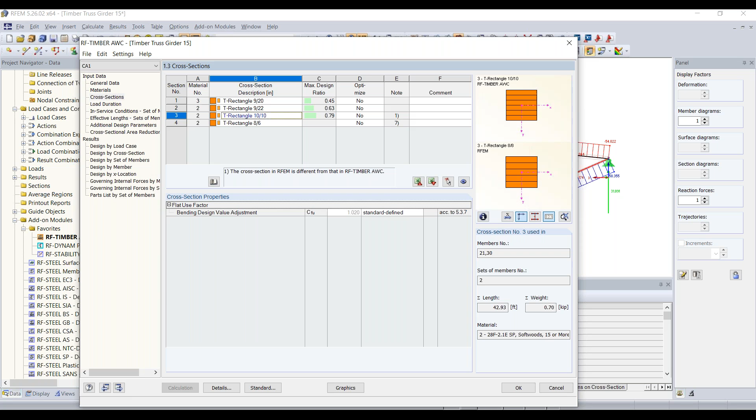And then we can just hit recalculate, and the results will look the same, but now the cross section in RFEM is actually changed. So that's how you go about optimizing cross sections using the add-on module.

So now what we can do is go up to File and Rename, and we can have multiple cases. So this case we'll just call the upper plus lower chords. And what we can do is create a new case, and we can design all of our diagonals.

And we'll save our changes. And then what we want to do, again, is uncheck. We don't want to design all of our members. We just want to design the diagonals. So what we can do is hit this button to select them graphically.

And an easy way of selecting all of them graphically instead of clicking all of them is, I want to just show you this tool up here called Select Special. And this is handy if you have a large model and you need to select all of the same cross section within a model. You can hit this activate members.

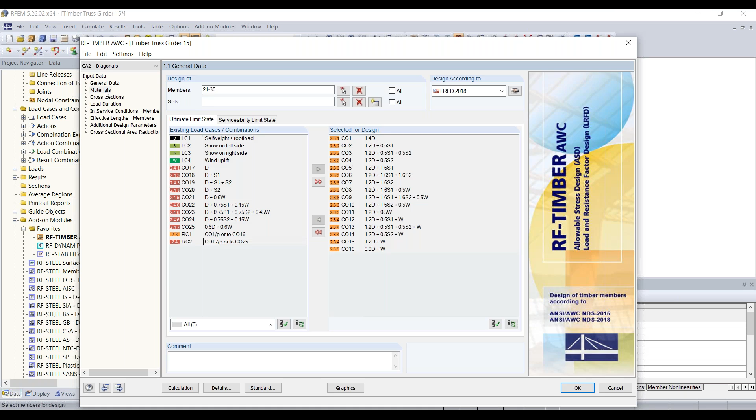And so since we exported all of our optimized cross sections, they're all optimized. And so we probably should be seeing some green lights for all of them, or green smiley faces. So what we can do is select all of them, move over our combinations, and then choose design according to, go through our materials, cross sections look good, load durations, and in-service conditions we'll leave the same.

And then for the effective lengths for all of these diagonals, this is where we would leave all of them as the full member length, since they will all be experiencing, or it could be possible that there's buckling or lateral torsional buckling going on. And then also, again, additional design parameters we'll leave the same. And so then we can run our calculation.

And now you can see that we have our max design ratio of 0.82. So if you're curious which combination is causing the highest design ratio, we can filter over here to max and hit apply filter. And now you can see that bending and tension from combination 6 and member 30 is causing our highest design ratio. So good to know.

And if I click on the member here, this red arrow is showing me which member is giving us the highest design ratio, or our critical member, basically. And then we can also take a look at our results graphically if we wanted. So we can hit graphics, and we can see graphically our design ratios as diagrams on each of our members here.

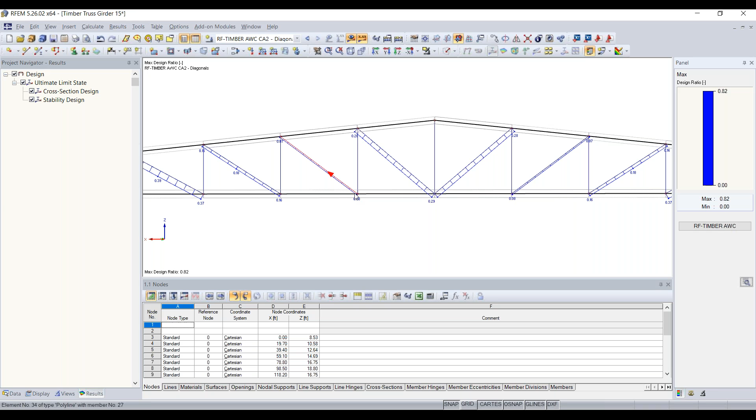So these diagonals in the center here, we don't have to worry about those at all. We could, if we wanted to, increase or decrease those cross sections. And yeah, we can go back. And then we can create a new case and design our verticals. And again, uncheck all, graphically, and use our select special tool here.

Actually, I forgot to, oh no, I lost my window. Well, so yeah, I lost my select member window, and not sure what happened to that. So let's see if we save. And we'll just save all.

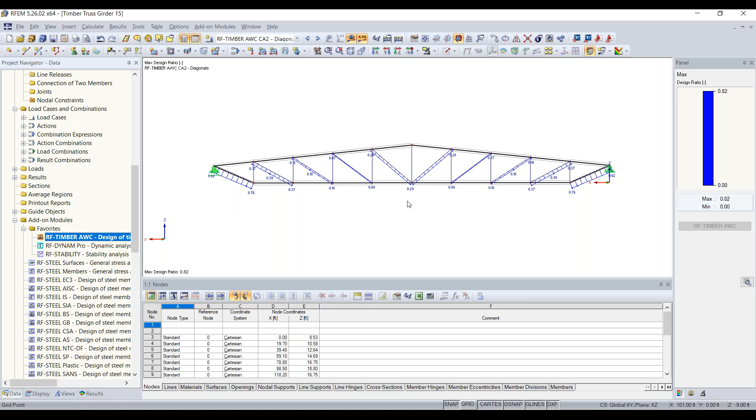The only question that came in was the ability to analyze shotcrete. I had answered in the chat, but just to clarify, realistically, if a material doesn't exist in the program, you can always add a user-defined material. So as long as you have those properties, you can essentially copy the existing concrete material and add in the shotcrete material properties, then the full analysis can be completed.

I don't know about the specific standard that you're referring to for concrete design and if it addresses a material like this. I know the ACI standard and CSA standard for North America, I don't believe address this. So the design modules are based on just typical concrete materials, which are also listed within the program. But again, it's always possible to analyze any material within RFEM as long as you have the relevant material properties.